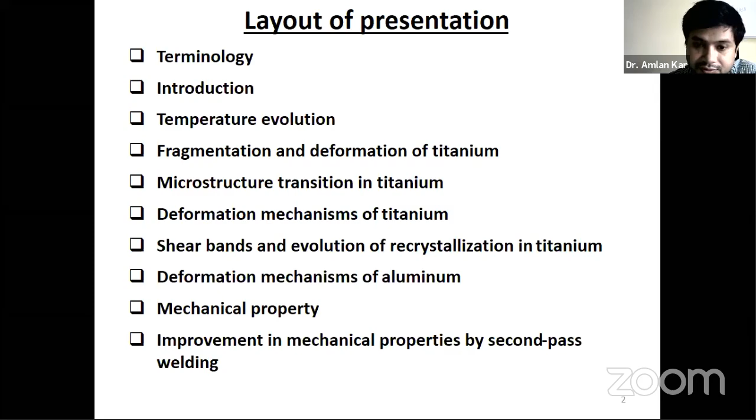So this is the common phenomena we have seen, the two body interactions, in case of friction. Friction is nothing but a force between two surfaces that are sliding, or trying to slide, during the process.

For example, when you try to push a book along a floor, the friction makes this difficult. Friction always works in the direction opposite to the direction in which the object is moving, or trying to move, like in this case.

Here you can see the surfaces trying to move on top of one another. This phenomenon can be seen in different industries and systems, like bearings, gear drives, machining, tires on the road, hip joints - whenever there is movement between two surfaces.

The only thing is that during the relative motion, there is deformation at the interface, and that leads to an increase in temperature, and welding - micro welding - takes place. And all this finally affects the friction and wear behavior at the interface.

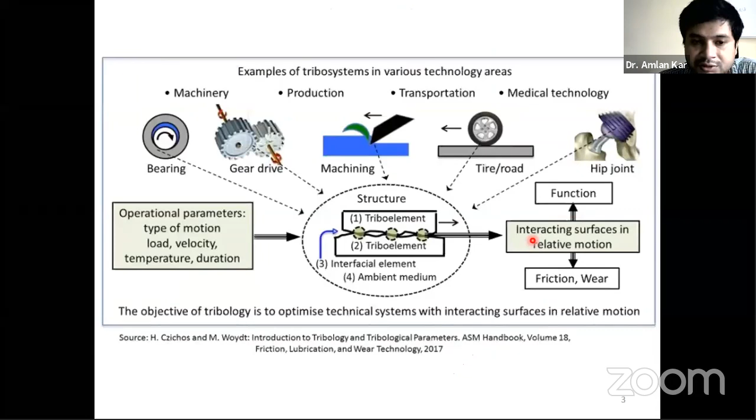And the deformation behavior, what I am talking about at the surface and subsurface level, depends on different process parameters, like what is the load, the velocity, temperature, and the duration of load application.

So now I'm moving to friction stir welding. Just see how friction stir welding works, what that means, and then you can easily visualize it.

If you want to see friction stir welding, this is a schematic view I have taken. You can see the tool being rotated, and it consists of a shoulder and the probe. When the probe is inserted into the abutting interface, that probe actually gets inserted into the material, but not the shoulder.

The shoulder has actually touched the surface. When the shoulder touches the surface, you are not plunging further. So after that, what are we doing? We have started traversing the tool along the interface.

Because of the friction generated between the tool and the material, there is an increase in temperature, because friction generates temperature evolution. You can see here there are two materials, material 1 and material 2. So depending on the deformation behavior of each material, the actual shear stress developed on the material varies.

By simple terminology, if the temperature is very low, then what will happen? It is difficult. The tool material, whatever is there, it gets subjected to wear and tear.

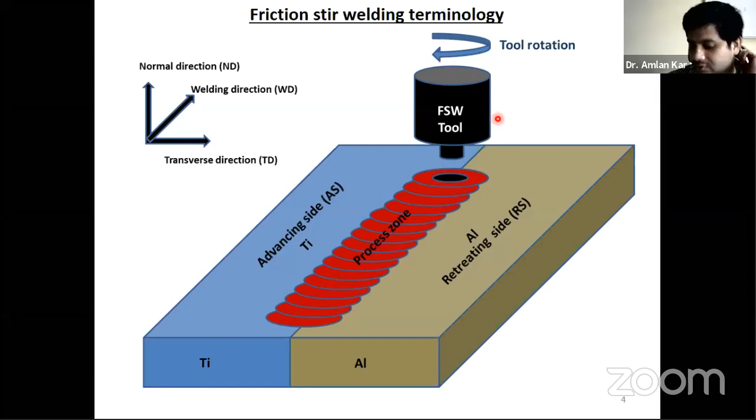So during the rotation, you can see here, this is the direction of rotation. This is the plastic zone developed because of the high temperature being evolved due to the friction, and this material being plasticized.

You can see here that because of the rotation, there is a different sort of shear stress developed across the tool, and the material is subjected to all kinds of shear stress, if it is rotating continuously with the tool.

If you think that the coefficient of friction is 1, or it is sticking friction, then all kinds of shear stress, all kinds of movement are being experienced by the tool. And this is the plasticized material you can see.

And if it is close to the sticking friction, at that time the tool and the deforming material try to hold each other, and that is called sticking friction.

Because of that, two phenomena are possible. One is wear out of the tool. If the load bearing capacity of the tool is less, or the shear strength of the tool is lower than the shear strength of the deforming material or the applied shear stress, then there is wear out of the tool. In the other case, there is shear deformation of the material.

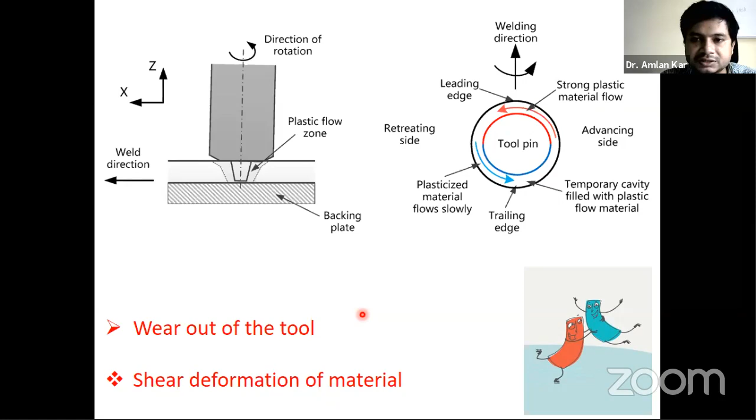At low temperature, these are the two materials very important in case of the aerospace industry. That's why we are trying to develop the welding structure for the aerospace industry. This is a very important material, aluminum and titanium. Aluminum is used about 20%. Earlier it was more, but nowadays composite material is trying to replace aluminum in the fuselage structure.

But the challenge, as I have discussed, is the difference in the physical property and the formation of intermetallic phase. Because in any welding, whenever there is an interaction between two materials at high temperature, there is diffusion and reaction. Because of that, there is a lowering of the Gibbs energy at the particular composition and temperature, and that leads to the formation of the intermetallic phase.

Since this process is called a solid state deformation process, whatever temperature is developed, it is a friction-based temperature. And friction at the melting point is close to zero. If you assume the temperature is increased to the melting point, then friction will reduce, and therefore there is a reduction in the flow stress.

If flow stress reduces, then there is an increase in the coefficient of friction. So these two phenomena actually counteract each other, and therefore there is a stable temperature development in case of friction stir welding. That's why the temperature evolved in friction stir welding or friction stir processing of the same single material is close to 0.7, 0.8, or 0.9 of the homologous temperature. It's just close to the recrystallization temperature, basically.

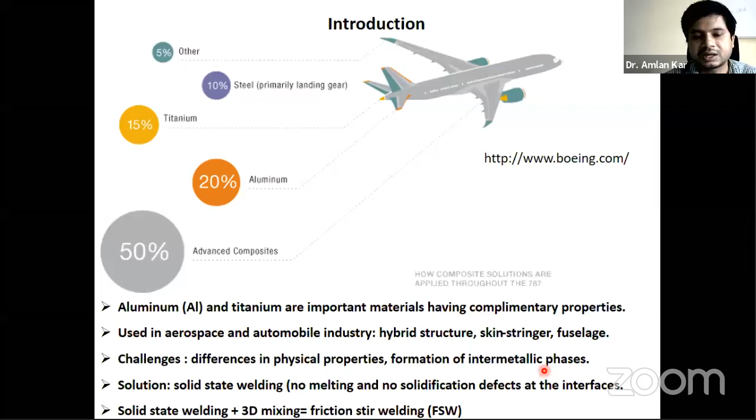And in case of friction stir welding, we get two advantages. One is the solid state method, the low temperature deformation process, therefore there is low distortion. The second is the three-dimensional mixing.

And as I was telling, there's friction due to the crystal structure difference in the physical property and heat conductivity, and therefore there is a lot of inhomogeneity across the interface.

You can see from this diagram there's a difference in the flow stress of aluminum and titanium. So assuming aluminum is not there, the deformation actually takes place on the titanium, if you nullify the aluminum deformation. So if you concentrate on the deformation on the titanium, you can see there are fragmentations, and on this fragment, aluminum diffuses, and therefore there is a reaction.

And this reaction leads to the formation of the intermetallic phase, because in this zone, the temperature is very, very high due to the deformation. Why is the temperature very, very high? I will come to that later.

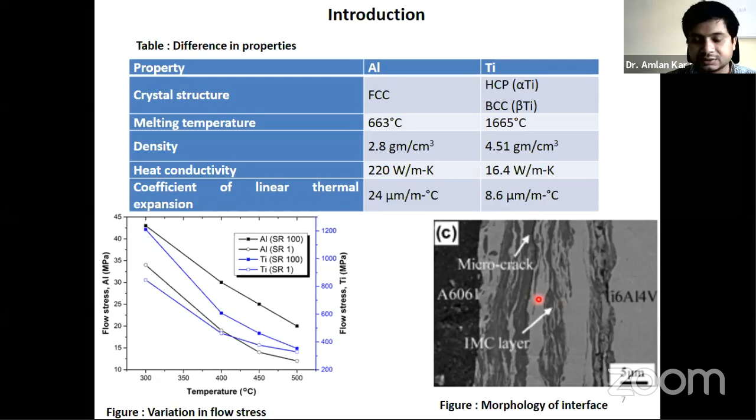Overall, we try to analytically calculate the temperature here.

Why have we taken the average of the shoulder temperature? Because we are assuming that the temperature developed below the shoulder is uniform. There are two aspects here: the most important is recrystallization, and another is that the friction value is not overall constant—we think it is close to sticking friction. Due to sticking friction, you can see aluminum actually sticking to the plate as well as the tool, which is clear evidence of sticking friction being very active. But at the edge, there is not much sticking, though there is a very high velocity gradient. So overall, we assume the temperature is more or less constant below the tool shoulder.

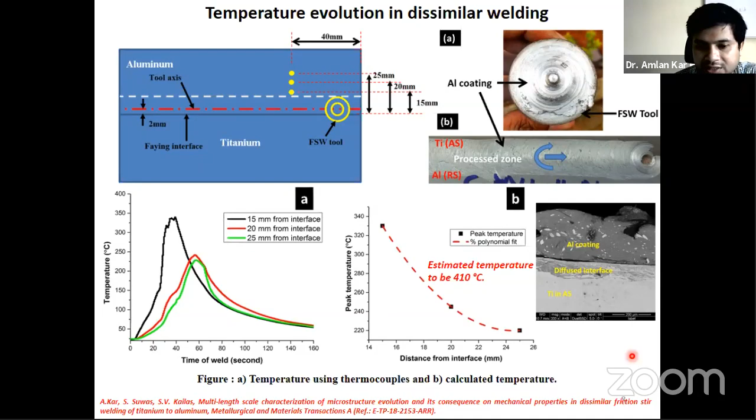Now let's look at what kind of deformation takes place. You can see the coating developed cross-sectionally, and we have also observed many small particles, mostly visible in the backscatter image, which could be titanium particles. However, we have also observed that these are not fully titanium particles—this is an intercalated particle.

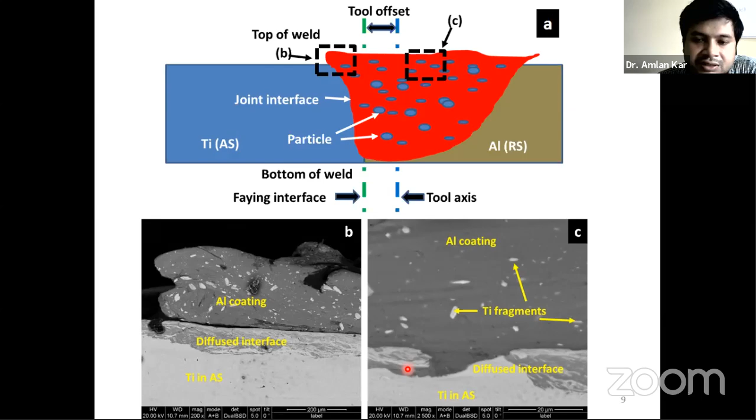What does intercalated mean? You can see there is fragmentation inside the particle, and through the fragments, hydrostatic pressure develops inside the weld nugget. This hydrostatic pressure pushes aluminum into the fracture location, causing the aluminum and titanium to clutch to each other. Due to the temperature developed during welding, some diffusion and reaction take place inside the particle, forming a kind of mechanically mixed particle—this is called an intercalated particle. It's a thermomechanically developed particle, because both temperature and pressure are involved in forming this sort of particle.

But while measuring temperature, I mentioned it could be low temperature—how can we be sure of this? For that, I said the temperature below the shoulder is uniform. To understand the behavior further, we have also developed a friction stir welding model, a friction stir process model, using Deform 3D. This is only the processing model—I'm not saying it fully justifies the model, but it helps us see whether the temperature below the shoulder is constant or not.

This is the primary work we have developed. We omitted the tool to observe what level of temperature develops. This is a different material, so we get a slightly higher temperature, but basically we have seen that the temperature below the tool shoulder is more or less constant—the variation is maybe 20 to 25 degrees centigrade within the area below the tool shoulder. So this is the idea. From there, we have some conclusions about what the predictions are, which may be correct.

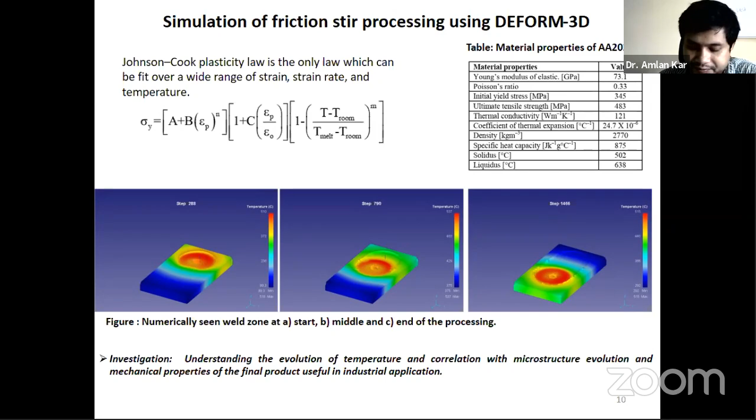But one thing is that you can understand that throughout the weld nugget, you have some particles. So the particles are more or less homogeneously distributed, or you can see that in all locations you have some particles.

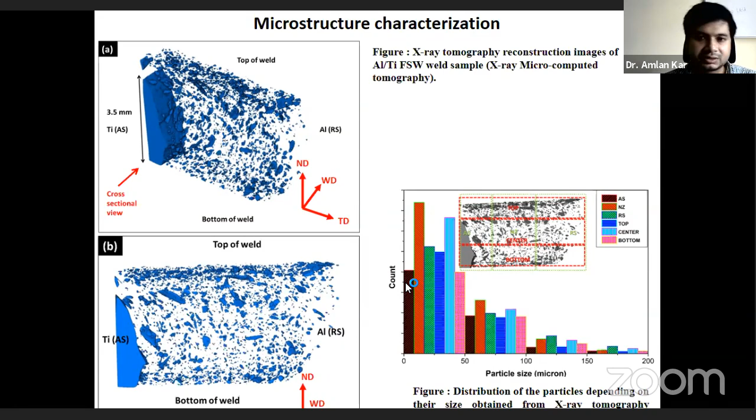And that is because of the deformations on the titanium side. You can see that at the top side you have a higher deformation in comparison to bottom because of the heat affected region. Then we have seen at different locations - this is the retreating side, this is the advancing side, and this is the top.

And one thing, even though they are more or less haphazard, we have seen that the deformation behavior or the fragmentation behavior of the titanium has some similarity. What is the similarity? If you reduce the particle size, when the particle size reduces continuously at each location, there is an increased fraction of the particles, or increased number of counts of the particles. In other words, the very fine particles in each location are having more numbers compared to particles with higher particle size dimensions. So this is the observation.

Then we have separated out the particles based on their volume or particle size, and we have seen that very fine particles are more or less homogeneously distributed compared to the coarse particles. You can see there is a lot of whites, and their distribution, their orientation is not very homogeneous. But here the fine particles are having very good distribution.

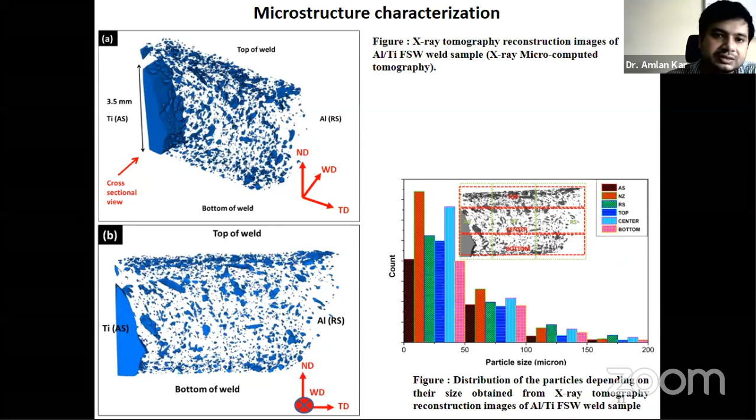A similar approach we can see over here also. So fine particle fractions are very, very high, or the number of fine particles is very, very high compared to the coarse particles.

And when we have seen the microstructure at the interface - this is the interface, this is the aluminum side, and this is the titanium side - we have also seen that there is recrystallization in the titanium. This is quite an unusual phenomenon in case of titanium, which is subjected to deformation at low temperature as low as 410 degrees centigrade. At this temperature, we generally do not expect recrystallization to take place.

This is the recrystallized phenomena. You can see it has different grain orientations, and this is mostly high angle grain boundary. You can see this is the 15 to 180 degree deviation. We can see this is the high angle grain boundary.

And from the KAM map, we can see this actually shows how the dislocation distribution is more or less homogeneous. And even from the GOS map, which defines the recrystallized grains, where it is blue, and the orientation deviation from 0 to 2 is actually called the recrystallized grain - from there we can see there is recrystallization grain.

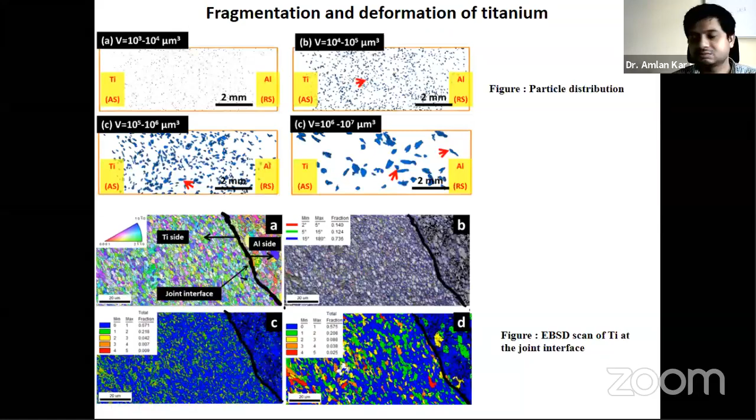There's a huge number of recrystallized grains present over here. So this is the sort of recrystallization that has taken place. This is quite an unusual phenomenon in case of titanium, which is subjected to high strain deformations at low temperatures.

As we are moving close to the interface, we can see there is a huge fraction of twinning, and the microstructure also somehow refines compared to what we have seen in the base metal.

From there we can understand that since titanium has HCP crystal structure, which has only three slip systems, of which 2 are independent slip systems, and titanium has low thermal conductivity, the deformation leads to temperature evolution that could not transfer from the deforming locations to the surrounding locations under high strain rate deformation conditions.

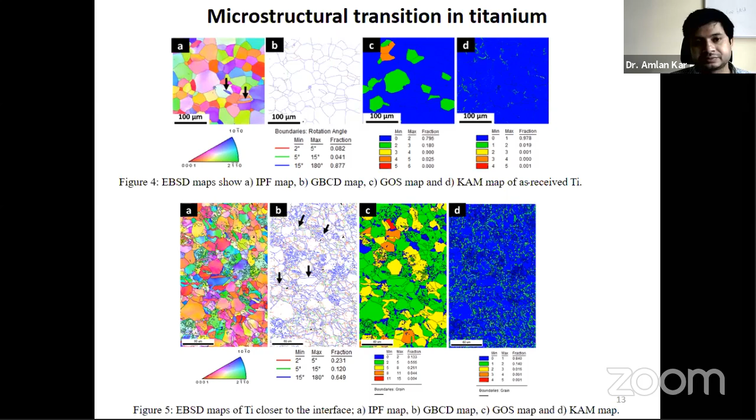At the interface, there is a possibility of formation of adiabatic shear bands, and this leads to formation with evolution of higher temperature, close to 700 to 1000 degrees centigrade, which could possibly lead to recrystallization in titanium at the interface.

But if the recrystallization is taking place due to the adiabatic shear band process, then we can expect similar features in particles as well, because this is the adiabatic shear deformation process. That means the shear deformation is taking place only at certain locations, not at the gross level.

So the adiabatic shear band also promotes the formation of voids, and during deformation these voids actually connect to each other, leading to a possibility of formation of particles.

The same thing we can see here, there is formation of voids, and when connected, it forms a crack. During deformation, that crack developed further along the shear deformation directions, and that led to the formation of particles. You can see that this particle is actually formed from these locations.

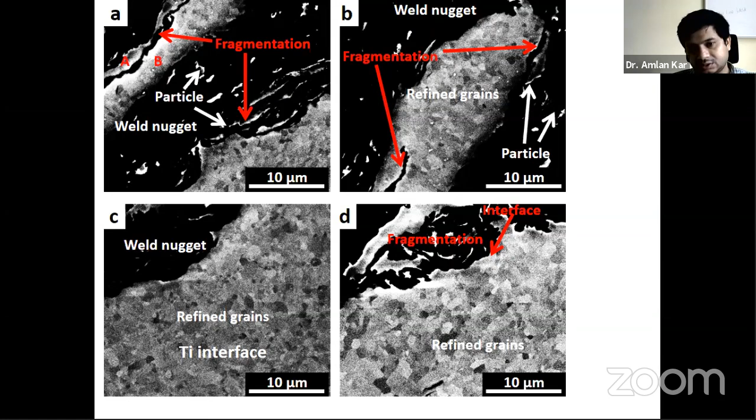As I already discussed, this is the mechanism which leads to the formation of particles as well as recrystallization.

And this is the recrystallization phenomena, as I already discussed. When there are very fine particles, there is a higher surface to volume ratio, which leads to higher surface reactions.

Leading to the formation of intermetallics as well. So this very fine particle is not actually the titanium particle, it's actually subjected to reaction leading to the formation of intermetallics.

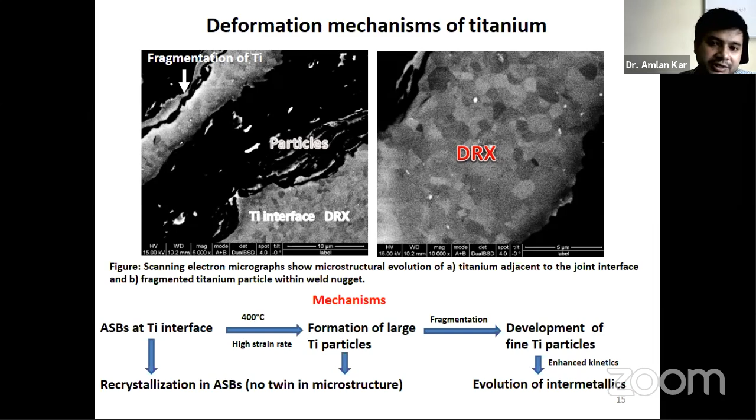There are some examples where people have also observed this adiabatic shear band. On the adiabatic shear band, people have observed recrystallization grains. You can see there's a very fine recrystallized grain, and this is the deformation grain.

But it's not subjected to recrystallization because it is an adiabatic deformation process, and the flow stress in the adiabatic shear band is very, very low, and therefore will lead to fracture, leading to a higher amount of shear deformation.

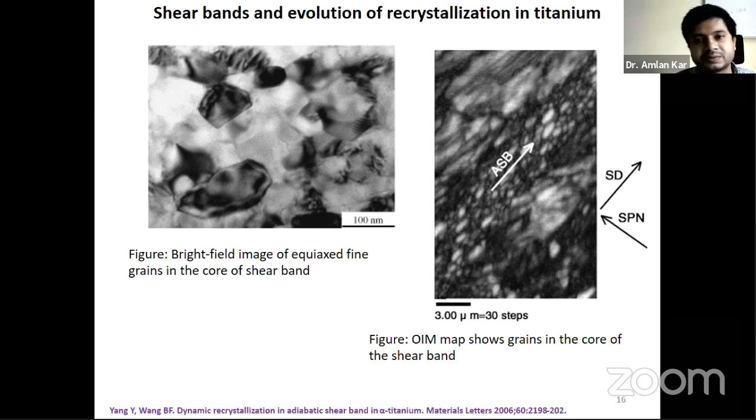This is a bright field image showing the fine grain. You can see the core of the shear band, and there is no dislocation, there is no twinning. So this is clear evidence of adiabatic shear band driven recrystallization, which is what we have seen in our experiment as well.

And there is a few examples from the microstructural point of view. You can see from the optical microstructure, there is adiabatic shear band formations, and these adiabatic shear bands are parallel to each other, acting along the shear direction. At the advancing side, the deformation direction is from the bottom, or the flow of material is from bottom to top, because of the hydrostatic pressures and the shear rotations.

So we can see there is a deformation direction, and a mark of the adiabatic shear band line. From the tomography image, this is the shear direction. You can see there is a crack developed in the particle, and there is separation, leading to fragmentation of the particle into finer particles. This is the mechanism.

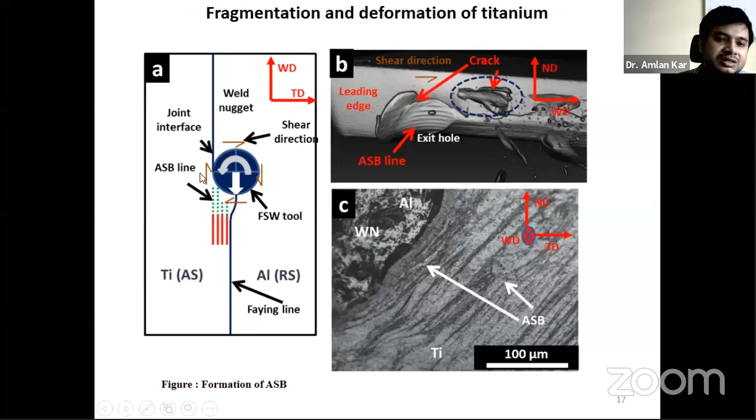On the advancing side, where titanium is present, this leads to the formation of adiabatic shear bands, and this adiabatic shear band leads to the formation of particles, as well as, at the interface due to high shear deformation, adiabatic shear band driven recrystallizations also we have seen.

On the aluminum side, we have seen very good, well recognized recrystallization microstructure. From here we can see there are a few grains, and we have already marked this grain boundary. There are three types of grain boundary possible. Historically, this is low angle, sub-grain boundary. This is low angle grain boundary. This is high angle grain boundary.

Any grain surrounded only by high angle grain boundary, we can call a complete grain. Here you can see there is no complete grain as such. There is a development of the grain, and during this formation process, there is a development from the sub-grain to the low angle to the high angle grain boundary. You can see here.

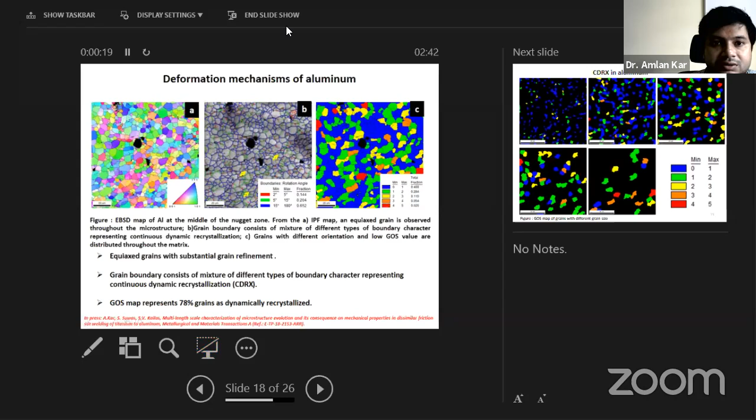Okay, sorry. You can see now, I guess. Shekharji, can you see now? It's visible, sir, it's visible. Okay, okay.

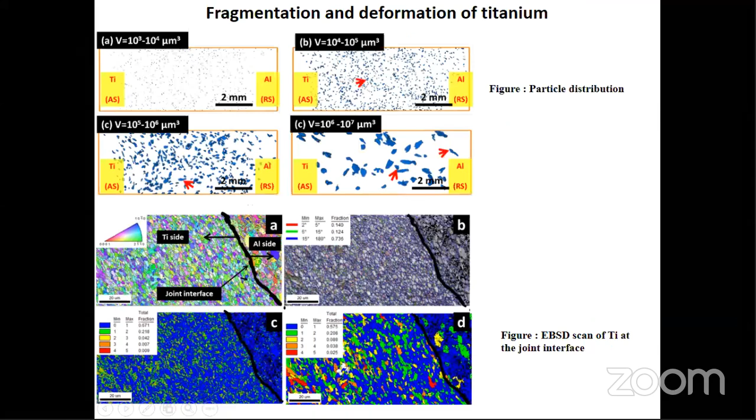So you can see there is an increase in the grain boundary from the low to the higher grain boundary, and this is the process by which the grains have formed. You can see a few grains: low angle, then sub-grain, then low angle grain boundary, then leading to the high angle grain boundary. So this is the typical feature of continuous dynamic recrystallization phenomena. And since aluminum has a higher number of slip systems and higher stacking fault energy, this is a common phenomena.

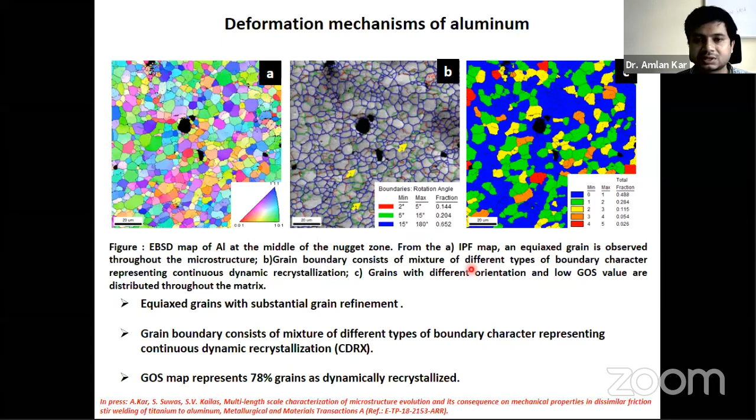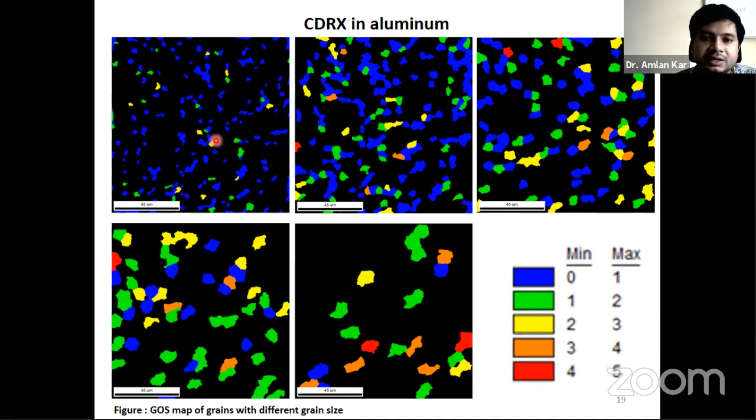This is not a low value of GOS, but in this very finer grain we can see there is a very low value of GOS. That actually represents that, in case of aluminum, the bigger grain is subjected to deformation leading to the finer grain — it's a process of grain refinement in case of aluminum. So this is the common phenomena in case of welding.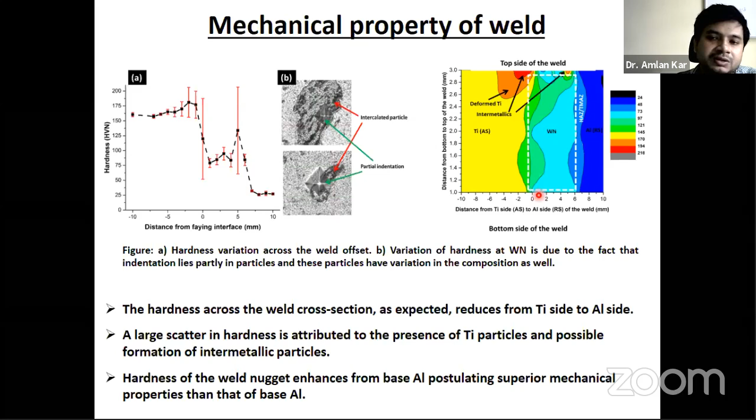So it does not have much relevance in case of tribology, but one thing I'm showing is the different kind of intercalated structure, where the matrix is very ductile because it consists of aluminum which is very much recrystallized, and this is the particle. Because of this particle distribution, you can see there is scatter in the hardness values, and this scatter is not homogeneous, it is heterogeneous, because it depends on the particle distribution as well. And we have observed a very good mechanical property.

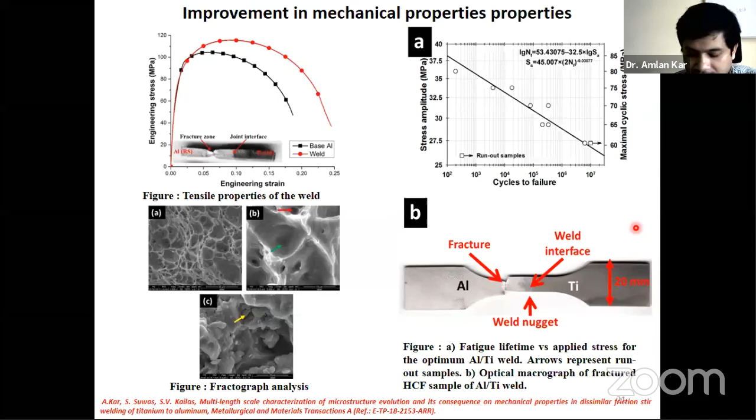You can see very good ductility, as well as the fracture location is away from the zone because of the particle distributions. And we have observed very good fatigue property as well. So this is the typical phenomena we have generally observed in case of welding.

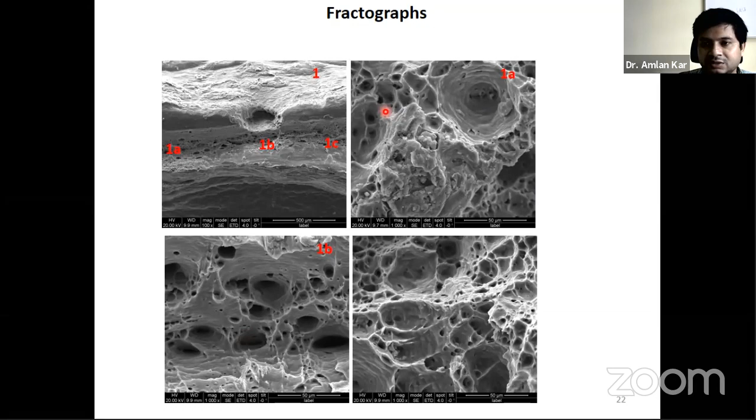And this is the fractograph. It shows that the fracture surface is composed of some particles, as well as regions where the fracture surface does not have particles. So it is a transition zone actually leading to the fractures, between the thermomechanically affected zone and the weld nugget - that interface is leading to the fractures. And you can see some sort of brittle fracture here, and some ductile dimples also. So these are the different mechanisms at different locations leading to the fracture of the tensile sample.

So in what we have discussed now, we have seen that this continuous deformation mode actually leads to the finer particles, and we have also seen that finer particles actually lead to higher mechanical properties of the weld. Therefore, when we do continuous welding or multipass welding - multipass processing, in your terminology - we can generate a higher number of finer particles. So that is what we have seen here.

As you do the second pass on top of the first pass, we can see very higher fractions of finer particles, and that distributes in the weld nugget. Depending on the microstructure, we can see there is a very fine intercalated structure in some regions, and there is a very thick layer of intercalated structure with a higher fraction of deformation in other regions. You can see this here in the weld nugget.

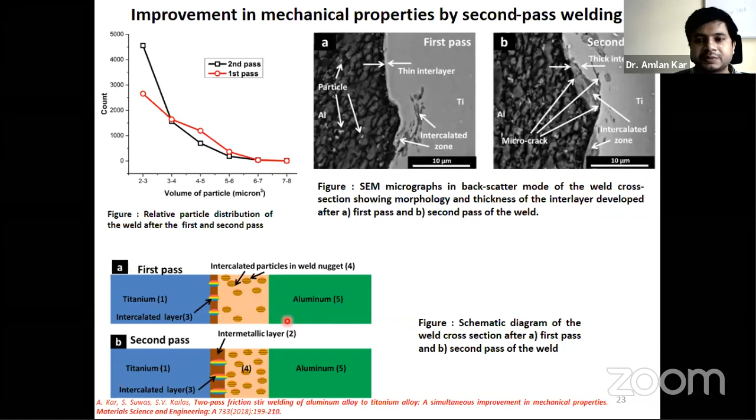Based on the microstructure, we have correlated the microstructure to a spring model, because in this location at the interface you have the intercalated structure as well as the intermetallic layer. These two are actually connected in parallel, but other different zones are connected perpendicular, or in series. Similarly, we have developed a model, and we have seen that this model correlates very well to the stress-strain behavior of the materials.

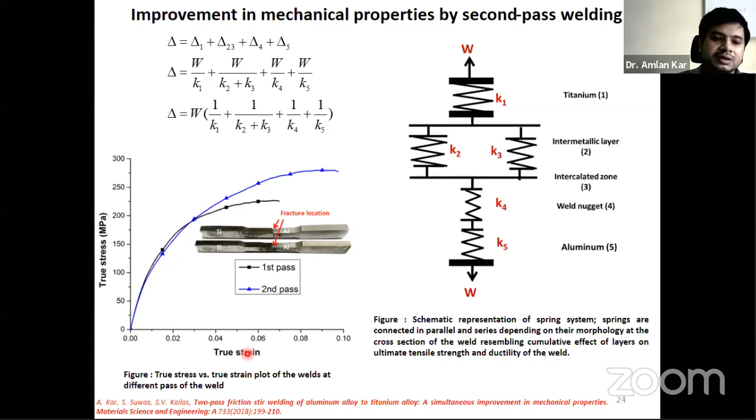So this is the summary of my presentation - what we have learned from here. This is the low temperature deformation behavior of titanium that we have seen. And from the welding perspective, as well as from the tribology perspective, we have seen how deformation takes place in different cases, like in two-body abrasion and other situations.

So actually the tool and the titanium are subjected to shear deformation at a low temperature, and that leads to the fragmentation and dynamic recrystallization. The mechanism involved, which leads to such microstructural development, is adiabatic shear band formation.

And why is titanium subjected to adiabatic shear band? Because it has a lower number of slip systems and lower thermal conductivity, and that leads to adiabatic shear band formation. Because of the adiabatic shear band formation, we get different kinds of finer particles, and this particle fraction is very important, because if you deform the material further, we can get even finer particles.

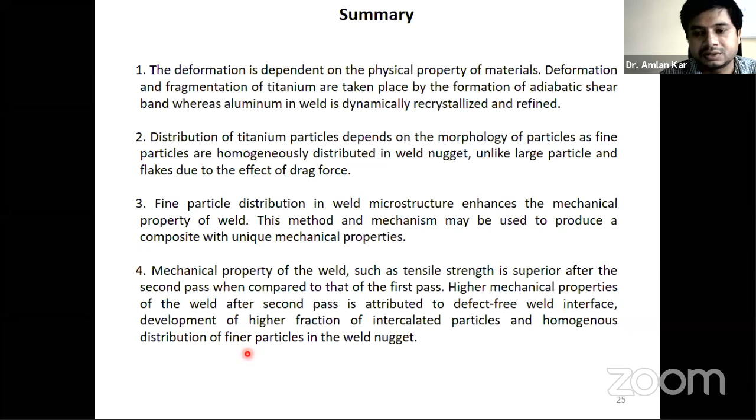This is a continuous process, and because of that we can tailor the microstructure in the weld nugget in case of welding, and get very good mechanical properties in defect-free welds.

So this is the end of my presentation, and I always believe that every ending is just a new beginning. So I hope this continues as our collaboration, our discussion, our friendship.

I appreciate all my attendees and participants for having good active participation in this question and answer session. Professor Radhakrishnan is basically a medical doctor, sir, belongs to non-engineering background, but he's very curious to attend almost all our sessions. He has given something new - he has been giving challenging tasks to almost all the speakers. But one thing we should appreciate is that the professor, out of curiosity, wants to know more about how this tribology can be utilized in his research areas. Thanks to Radhakrishnan sir, I appreciate his kind of motivation.